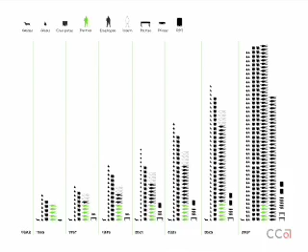But the 5 of us didn't really have a common stylistic sense. I think because we came from other fields, we were a little bit confused, especially in the late 80s, early 90s in architectural discourse, and the way in which architecture had been divided in the second half of the 20th century between sort of paper architects—the people producing culture and thinking, and all the fantastic design—and the kind of service architects, the people that could actually put buildings together and knew how to get things done.

They basically told us in school you had to choose one or the other. And that was really a kind of horrifying thing to us. We didn't understand why you had to choose one or the other.

At the same time, there was this moment where we were trying to understand, again as outsiders, this cycle of stylistic consumption that architecture had become obsessed with—where there was a new theory, it came out of writing, history, whatever, then it got a kind of form attached to it, then it got its big show at MoMA, then it was popular and made it into the New York Times, and then it was discredited, and then it was out of fashion. It was ridiculous to us.

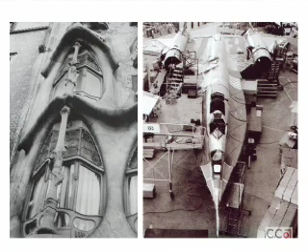And that was kind of exciting to us, that you could start to think about buildings in that way, and really began to use the emerging digital technology in the mid-90s, which was fast enough for us to begin to do simulations to really test if form and performance had a strong connection.

Of course, we looked at the history of architecture and the production of material, form, and ornament and its connection to technology, and we saw these long-standing relationships. Even though at that time the output from these experiments was often complex form, there was this incredibly long history of complex form in architecture.

The key thing was that when complex form was being made this way, it was all based on labor. Materials were expensive and labor was cheap, so you could build in one particular way. But in the latter parts of the 20th century and currently, it's labor that's expensive and materials that are cheap.

So very early on, we realized that the only way we were going to get some of this built, especially as a young firm that wasn't going to command the budgets that more established architects would get, would be to take advantage of CNC technology.

So in '98, '99, 2000, we decided to invest all of our thinking into CNC technology and to start using the computer as a way to fabricate this and to try and get towards the idea of mass customization.

Now one of the things that we started to realize, and I'll show it to you as we go through some of the projects, was that the notion of plan, section, and elevation really became a kind of limited language for us. There's something we're really trying to challenge there, and a lot of the investigation and research of the firm has gone into reevaluating if that's the best method for us to get our ideas across to the people who need to fabricate and build buildings.

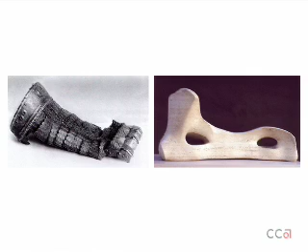For us, it really was never the form that mattered. It was how something was made and what it did that mattered to us the most. And the more we pushed into this realm, the more we realized we were kind of going backwards in a way towards a kind of master builder sensibility, if you will.

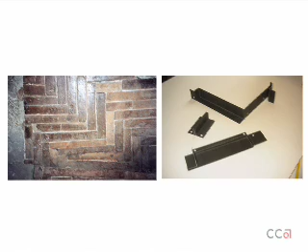So whether it's a few of the bricks from Brunelleschi's dome or 3 of the 4,000 custom pieces of zinc we made for the Porter House, we realized there were territories that had been given up by architecture over the past 30, 40, 50 years, and that it was time for us to grab them back and take responsibility and take risk and rethink the way in which architects could practice in order to push the limits of design.

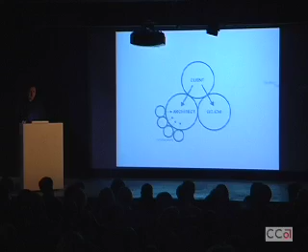So this is the only drawing in the AIA documents, and we have determined that this is the worst drawing ever made in the history of mankind. This is a drawing made by lawyers to try and make architects and owners and contractors fight, in order to force them to have work for the rest of their lives. And I'm not kidding, I'm not being facetious.

So I think a lot of the way we've started to really push practice in thinking about it was to try and challenge this diagram. Now, obviously it's very entrenched, and there are a lot of things you have to watch out for as you do it.

But I think step by step, and what I'll show tonight is 6 or 7 projects that talk about how a young office tried to grab these things, and in each project take one little step with R&D that both pushed the architecture, pushed the technology, and pushed this kind of structure behind the way in which things get made.

So very early on, I think the earliest and most obvious way to start was absorbing the consultants into the design process. Now, of course, we're bringing the engineers in, the mechanical and structural guys, but it wasn't really that. It was actually bringing the fabricators and even the subcontractors into the office before we would even design anything. So by saying, well, if we want to make something out of metal, let's bring metal workers in.

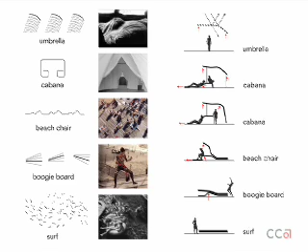The other thing we thought was interesting about the performative nature of a beach was the idea of the promenade. The fact that you either sit on the beach and watch everyone walk by, or you go for a walk and look for your friends, and there's always that interaction that occurs on a beach.

So we placed the architecture in such a way that the people hanging out at Dunescape during the day were the people sitting on the beach, and the unsuspecting museum goers passed through the architecture in such a way that they became the promenaders.

And we had 3 weeks to design it and 3 weeks to build it, and a budget of $50,000 for an 8,000 square foot space. So we said, well, we better make it simple. It's the only way to do it.

So we said, let's take just one structural element, which were 2 by 2 sticks of cedar, and we set them up in an AB configuration, the connection point being the spline that we pushed and pulled in order to make the surface bend and move, allowing every one of those programs to unfold on the surface. This was the first sketch of that.

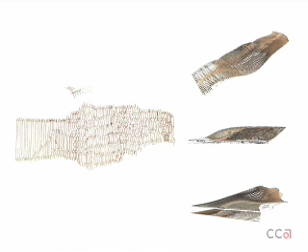These were the early models. This is actually the model of the element. The reds are the A's, the blues are the B's.

And Alanna Heiss, she was a great client. She said to us, I'd like you to produce an architecture that encourages as much illicit behavior as possible. So we said, well, what do you mean by that? And she said, I'd like people to take off their clothes and smoke as much as possible. So we actually embedded huge ashtrays right into the thickness of the walls themselves, and all of the dimensions were taken from dimensions of the human body, meant for people to overlap and continually touch while they were involved in the architecture itself.

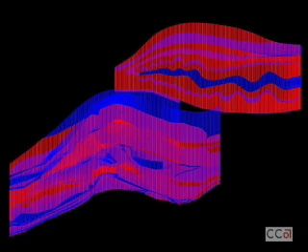Now, this is the construction drawing set. It's not out of focus—each one of these drawings, here's one blown up, was 15 feet high by 30 feet long, put down as full-scale templates. You basically followed the colors in a sequence, followed the black lines, lined up the two pieces, and whenever they crossed, you hit it with a stainless steel screw, and trimmed off the two edges, with the Z coordinates down here at the bottom.

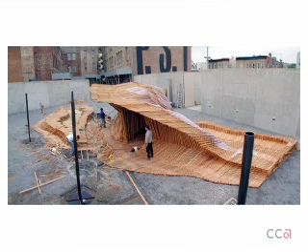And so you could see the pieces going together very quickly and inexpensively. And then we dug in the courtyard and planted a forest of steel trees that had high pressure mister heads on top. Here's the Dunescape when it was finished.

And then about every 15 or 20 minutes, they would blast and fill the entire courtyard with mist, which, as you were lying there baking in the sun, would be like the sort of spray off the ocean, hitting the cedar and wetting it, giving this incredible smell to the whole courtyard.

But here you could start to see the kind of smooth transition from a bench to a wall, or from a shaded area to a pool.

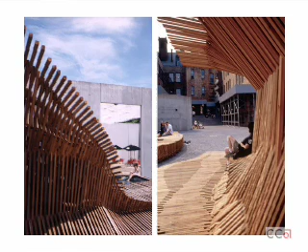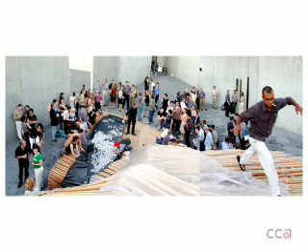This was the night before the opening. They gave us the courtyard for one night, so we filled the pool with beer and had our own party.

These were some of the interior spaces. The other interesting thing was we developed a series of secret chambers inside the thickness of the structure itself, designed for two or three people at a time, that you could crawl inside and see everybody at the party, but nobody could see you. They were unbelievably well used all summer long.

And this was a typical day at Dunescape. The interesting thing that happened was we got a lot of press from this, and people were excited about the architecture. We had so many articles that it actually drew more than 6,000 people per weekend.

As the summer was winding down, I was sitting there hanging out, and I said, that's interesting. 6,000 additional people times 10 weeks times $10 admission plus 3 beers and a hot dog or hamburger average. Suddenly I realized we generated about $1 million in additional revenue for the museum that year, and our fee was $12,000. I said, something's really wrong with this architecture thing.

We've got to try and fix it. But I think there was something very interesting that happened at that moment for us: we finally felt free of the kind of modernist canon of the separation of structure, skin, and program. And we started to get very interested in the notion of thickness.

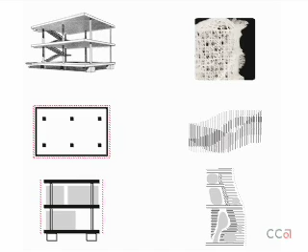Talking about that journey, there were certain things we did learn that we applied for some other little projects right around that time. Richard Branson saw PS1 and asked us to do the first-class lounge for Virgin at Kennedy Airport.

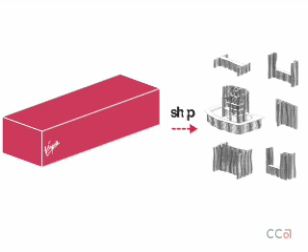The idea is that typically a first-class lounge is behind a closed door and you never see it. The idea here was to make a first-class lounge that was almost a billboard, an aspirational billboard, that you could see, you couldn't really get into, but it might encourage you to upgrade to a first-class ticket.

It's funny, I just saw this morning for the first time in a year because I took Virgin Atlantic out this morning, and I knew something was missing. They removed that part.

The thing is, you check in over here and you can see right through the screen out to the runway through this lattice work that holds the lighting and the structure and all the forms. But as you move into the space, a kind of moire pattern emerges that gives a certain intimacy to the spaces themselves. There's a waterfall and a stream that blocks the sound qualities of the airport.

Can you see that? Yeah, you can. So again, this was one of the first times that we really got into developing nesting drawings for the mills to fabricate pieces.

All the parts were made into component pieces that could be delivered to the airport and assembled in a certain sequence that would get us around a series of rules with the Port Authority.

There's a whole lighting system that goes from yellow to orange to red that's timed with when the flights to London are leaving. So the redder the whole space becomes, the faster you have to run to the gate to get there.

It also brought us to a project we did outside of Seoul, Korea. It's called the Hangil-sa Bookhouse. Hangil-sa is sort of like the Rizzoli of Korea in a way, and it's part of the Heyri Art Valley Complex.

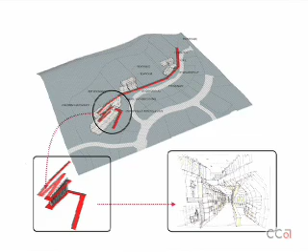You actually come off the hillside and enter the building at the top, then walk down a ramp around a 3-story high wall of books that are the bookstore itself, and come down into a kind of restaurant and cafe space. There's a sculpture garden here.

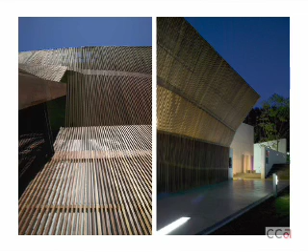We prepared all these drawings, and it got fabricated in Korea and assembled like a kit. And it worked pretty well. Here you could see the bookstore as you come down and you move around, and what the building looks like at night.

But the more we got involved in this, the more we realized there was a lot we were doing with the contractors and construction managers to actually get this stuff built. So on one project, Mitchell Park, which was a competition we got third place in but eventually got the commission to do, out on the eastern end of Long Island, about 120 miles from New York City in a rural fishing village.

They had a 4-acre open spot. This is Main Street, and that's Front Street there. There was a big open lot, and they held a competition to build a park. They had a series of programs that they suggested, but really there were only a few they insisted upon, and the key one was a carousel.

The town's prized possession was an antique carousel given to them by the Grumman Corporation in the 60s. It sat in a Butler building right here on the corner. They charged $1 a ride and got about 1,000 rides a month. So they wanted a new carousel house in the park, and of course they wanted it to be a Victorian carousel house.

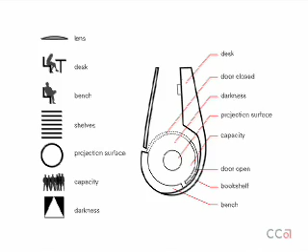And then the last piece that we were going to make — as we said, we started this project in '97, and this was now about 2000, well, we started working on this maybe around 2001 or '02. I think the idea for the camera obscura was to really push it.

Here was a building — we'd learned enough about using the technology, and it was a small enough building, and we had gained enough trust with the client that we really wanted to push it, to see if we could make a sort of pure performance envelope and have the entire building fabricated by the computer. So there was a certain series of programmatic requirements.

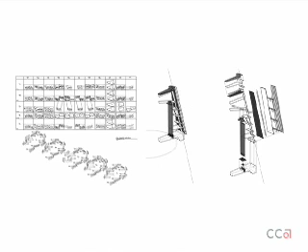We tried a kind of minimum surface form. This was sort of BIM version 0.01, where we modeled every single piece for the building. And these are the construction documents. In 3D, we cataloged and indexed all the different material types so you could see where they went. Then there were basically 2 kinds of drawings in the set.

There were drawings that explained to the computer how to make the parts, and then there were drawings to the contractor on how to assemble them. We basically produced the whole set, and when we were done — these are the actual construction documents. There's nothing, these are not presentation drawings, these are taken straight from the set: fold, weld, bolt, screw, you know.

And the interesting thing is, we were finished with it, and we looked, and we realized there were no dimension strings on the whole set of drawings, because they were totally irrelevant.

Every single piece arrives on site pre-cut, pre-numbered, pre-drilled, ready to go and put together. In fact, the worst day on the construction site was when Mark Hours, one of our guys, heard one of the contractors start a saw, and he just ran out shouting don't cut anything, because he had actually just picked up the wrong piece and it didn't fit, and he was going to trim it to make it fit, but there was no saw needed. In fact, the contractors didn't have tape measures on their belts for the whole process because they were irrelevant.

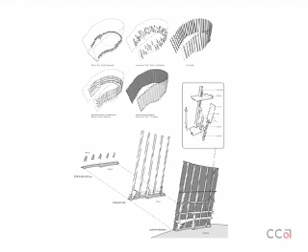So here are some of the drawings. You can see the equipment making the pieces, even the templates. These are the flanges on the compression ring, and we laser cut into the parts instruction sets showing where the welds go, which piece lines up where. It was all there to make them look at the drawings as infrequently as possible, and just be able to build it like the most kick-ass piece of IKEA furniture you could imagine.

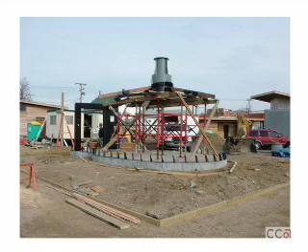And even the formwork was all milled as well, so the surveyor just shot four locations and then full-scale templated out. They dug the hole and assembled the pieces, and I think it was four guys who built it in about 7 or 8 weeks. And the piece went together. That's sort of the interior.

It was a really phenomenal thing for us, because we realized for the first time that, okay, there's something here. You can actually build buildings this way.

No one is ever suggesting that you build a 45-story building like this. That's not the point. But what you can do is find the critical parts of your building and invest a tremendous amount of time into thinking about how to do things this way. Then a lot of the rest of the building can be built using very standard methodologies. You could really see that this was something that was going to pay off a lot for our profession into the future, and it gave us a lot of confidence to move forward into larger projects.

And this is kind of what the whole park looks like now. There's the camera obscura out at the end.

So we started realizing that we were really doing a lot of good things for our clients, and making the money too. The last thing was that on the park they were getting 1,000 rides per month, and now with this new Victorian carousel house that they love so much, they get upwards of 50,000 rides a month in the summer, and it's actually up to $2 a ride now.

So it's generating hundreds and hundreds of thousands of dollars for the town, and they've planted flowers up and down the whole main street, and their real estate market's gone through the roof, even held on during the downturn. And it's not a surprise — Mayor Kapell, who really spearheaded this whole project, is also the town's biggest real estate broker, so I think he was pretty smart in using architecture as a way to drive desire.

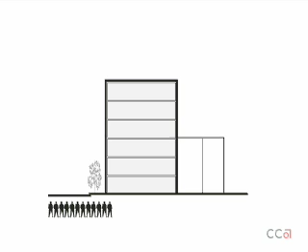So the first time we were able to do that was a building called the Porter House in the meatpacking district of New York, and there were 10 developers fighting for a 6-story warehouse building, a turn-of-the-century warehouse building. The owner was trying to sell it and obviously wanted the most money for it, and I think everyone was trying to think about how they could raise their bid to get control of this building.

So there were two smaller historic buildings to the south, and this building was built to its full FAR. And what we said was — maybe 7 out of the 10 developers thought about doing the air rights transfer. Now, there was a height limit in the neighborhood, and there's also a setback requirement from the street. So that was the sort of first thought, but of how much air rights we could transfer.

The next idea was the only way to increase the size of this addition, and therefore the potential revenue down the road—which would give a little more money to outbid the other developers—was to cantilever over these two historic buildings to the south.

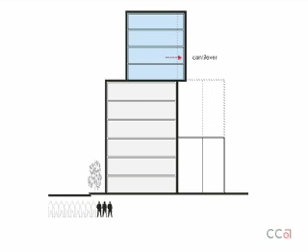Working with Buro Happold, our structural engineers, we came up with an interesting way of moving the core, which became a kind of new reinforced beam. We put a three-story Vierendeel by building a six-story new building onto the six-story old building, but overlapping on two floors, in a very inexpensive way, to get that cantilever out a little further. Those extra couple feet were enough additional revenue to allow us to be the last guy who could bid the most to get control of the building.

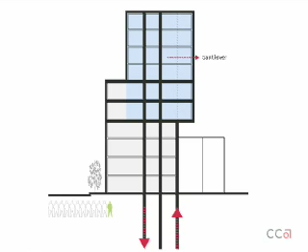So we didn't really have the money to do any of this, but we went for it anyway. We approached one of our clients and asked if they wanted a joint venture on this, and they said yes—it's really interesting, Jeffrey Brown. So we were going to take this new box and put it on top of a historic building.

I think we really wanted to push the idea of what contextuality meant. Our feeling about contextuality was that it shouldn't be contextual at all. So we decided, let's make it zinc. We wanted to use zinc and make a metal panel building—we hadn't tried that yet.

We talked to lots of zinc fabricators, and the prices were ridiculously expensive. So we actually went to France, where most zinc comes from, and bought one-meter by three-meter sheets of zinc, about a thousand of them. We designed the panels so that one unfolded sheet fit on a sheet of raw material, or two sheets, or three panels on a sheet.

We took four window sizes, all the same height, floor to ceiling, and had two light boxes—a thin one and a thick one. That made about 22 protoforms. We then played around and wrote an algorithm to spread these panels and pieces all over the building, almost making a kind of cloud that sat on top.

One key thing we felt was that when you're doing metal buildings, sometimes when the glass and metal are in the same plane, it gives a kind of thinness to the facade that we didn't like. We really wanted depth and texture, so we ended up pushing the glass back 14 inches everywhere on the building, which immediately made us think: we're going to have ledges everywhere. And in New York, we have pigeons everywhere.

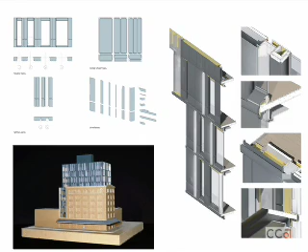At the end of the day, there were 4,000 different pieces of zinc in over 480 unique shapes. To draw all of that in shop drawings would be impossible—you just couldn't do it. So this was the first time we played with SolidWorks. We drew the panel prototype and then fed all the differences into a spreadsheet, which went directly to the laser cutter to cut all the parts. There were actually no shop drawings made whatsoever.

All the panels got labeled, laser cut right into the facade, and that was the instruction set for where the pieces would go on the building as it was getting built.

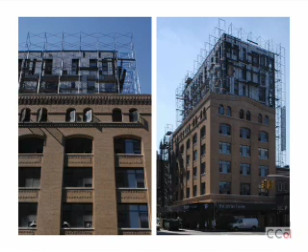Here you can see the facade as it's going on, and what the building looks like today. We started at that corner, went all the way around, and came back to the other corner—we were 1/32 of an inch off after putting up 4,000 pieces of zinc. So again, we were like, okay, this stuff works. This is a good idea.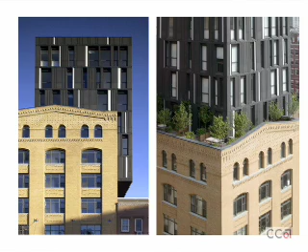They were condominiums, and we did everything—the interiors, the collateral materials, the lobby. Here you can see the cantilever portion of the building, the setback terraces, and the pigeon slides, which were labeled PS and then their number.

Is this going forward?

You can see the kind of depth in the paneling. We designed all the collateral materials, brought them to market, and sold them. It's a retail space in the base, with 22 units above.

Jason, are you here? Jason Anderson? Were you there the night we all went out drinking when we turned the lights on for the first night?

There was one night I remember, after a softball game, we went to the meatpacking district, and we called and they flipped the lights on, and we were like, hooray, and stayed out till 4. The next day I woke up with a vicious hangover, and my lights weren't going on in the apartment, and it turned out it was the blackout that had hit the East Coast that night. For like 30 seconds I was just like, I hope we wired that thing correctly.

But that worked out very well.

The interesting thing, and the amazing thing about the Porterhouse, was when we were going to do this, a lot of our colleagues, fellow professors, and friends said don't do that, you're going to get in bed with the developer, you're joining the evil empire, you've gone to the dark side. We were sort of threatened in a lot of ways.

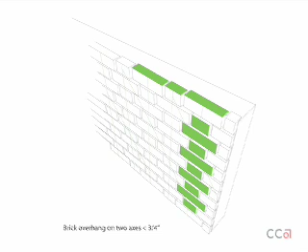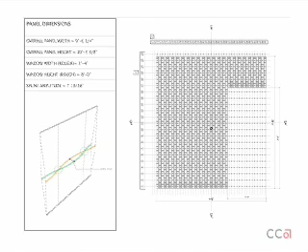So we studied tons of different brick patterns and overhangs, and worked on software that let us analyze different panel shapes and the way the panels and the sine curves would match or not match or come together, along with the orientation of the brick.

We looked at the requirements of window sizes, setbacks, and the building envelope, but tried to make the least number of eccentric panels versus standard panels possible.

It really developed an interesting feedback loop that we were able to drive the design out of, including how big the panels were—what was the biggest panel you could fit on a truck that could get into Manhattan through the tunnels and bridges without special permits, and how many panels could be made to use a less expensive crane with the fewest picks to get panels onto the building. All of that really drove a lot of the design.

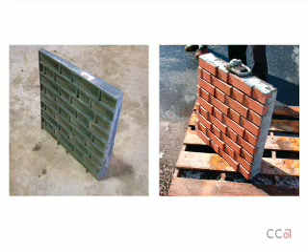So these were the test molds. This was the CNC milled mold, and then this was the test of dropping the bricks in and pouring it. And some of the earlier renderings.

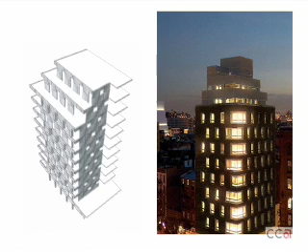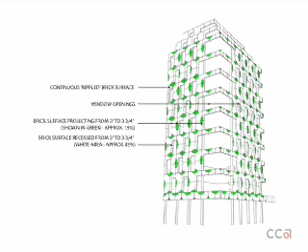This was kind of interesting. There's a small rule in the New York City Building Code where a certain percentage of your building can actually go over the property line, put in place to allow detail like cornices and window surrounds. We were able to calculate it to the brick, exactly how much of the building was going over the property line, and by giving the building department that much detail, we were able to push out the entire perimeter of the building by 6 inches. That doesn't sound like much, but 6 inches times the perimeter times every floor gave enough additional revenue that it actually paid for all the custom molds—so that was essentially free compared to a straight panel system. I know it's incredibly nerdy, but we get really excited about that stuff.

Other times we've worked as an advisor to our clients. A competition we did back in 2005—in fact how I met Isla, back in her Tulane days—was to do a new building on the campus of Tulane. This was going to be the Murphy Institute, attached to an existing building, one of the only buildings that wasn't orthogonally oriented to all the other buildings on campus.

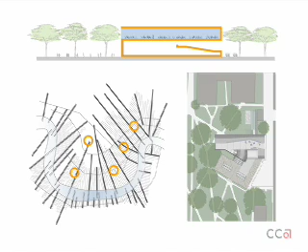The things we noticed about the campus were that it was incredibly flat, had a very thick tree canopy, but almost no shrubs whatsoever, and that really struck us. So the idea of the project was to float as many of the classrooms in the tree canopy as possible and keep as much of the ground plane open as possible, and then look at the ways New Orleans had always dealt with its geometric anomalies.

We used some of the same techniques that we used at PS1 for this building—it was an ethics, economics, and philosophy building, the Murphy Institute. Reed, Isla, and Martha had all said they wanted a building that would get people talking to each other from different programs, so we used these structures to encourage cross-disciplinary pedagogy and interaction.

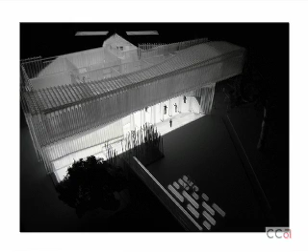This is actually the historic building with an atrium carved out, and this is the new building behind it. The students can move right through—here are the classrooms and the big lecture hall, and the students move through over here. And these were some images from the model.

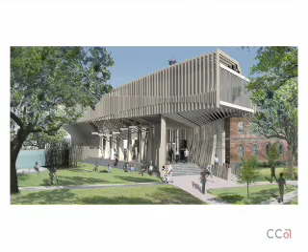We were really excited about it, and fortunate enough to win the competition. We spent the summer negotiating the contract and came to an agreement right around mid-August of 2005. We were supposed to go down there right after Labor Day, and then Katrina hit, and we figured the model had floated away somewhere down there.

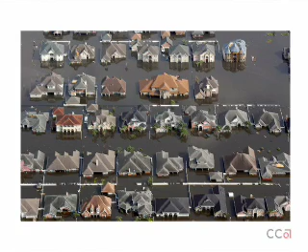But about 4 days after Katrina hit, Martha Murphy, the donor, called us and said she lives in Pass Christian, Mississippi—all her homes were destroyed, she was living in a trailer, and they needed help, someone who knows how to get something built. Will you come down there? So we said okay and went down. This is Pass Christian on day 7 after the storm—that's Main Street, about a block off the Gulf.

That's Martha's house, and it was a fascinating thing.

So we went down with Chris Sharpless and Craig Schwitter, who's the head of Buro Happold, New York. No one believed that we would actually camp. I'm from New York, you know, we don't know how to camp, and so they made us take pictures of that.

There's Craig talking to everyone. Craig was one of the guys who was on the pile the night of 9/11. He was one of the 6 engineers asked by the city to help take the steel down while they were still trying to do rescue efforts. And we did the first piece of infrastructure built at Ground Zero, the Rector Street pedestrian bridge.

It's terrifying, but between FEMA and the Red Cross, no one really knew what to do. The fact that we had worked on 9/11, albeit in a superficial way, suddenly we were in charge because we had actually dealt with a crisis before. A lot of the government officials were told, well, we really can't do anything. They were great people who wanted to help, but were instructed not to, which was a fascinating and eye-opening experience for us. So Martha owned this piece of property.

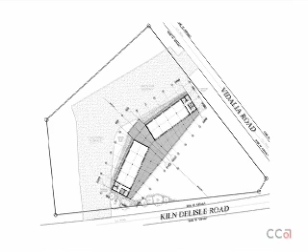So we made an entryway you came through with signboards and information kiosks. And then there was this big porch where the town could come together. We had no idea what would go in there. And Martha said, do something at least cool, don't make it look like a FEMA building. So we made this roof, this kind of big wing roof.

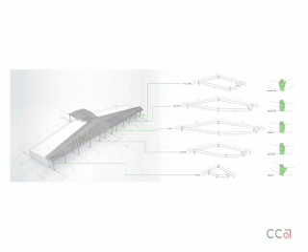We had very little skilled labor to work on it. They were either working on the big projects downtown or had left. So the way we were able to get the complex form done was through a series of custom flitch plates that we had cut in New York and sent down.

There were some guys from shop who were at the field office. They were amazing and dedicated so much of their time. Reese Campbell and Fed Negro were down there. And we got the Navy Seabees to clear the land and do a lot of the work in exchange for cases of Budweiser, which you had to drive 40 miles to get sometimes.

And here they are clearing the land. It got built in about 8.5 months. And this was right before people started moving in. I mean, now it has...

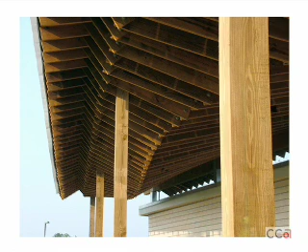A laundromat, a beauty parlor, a law office, a restaurant. It's sort of the seeds of a town. The lights are all up inside the wing, and it glows at night. And that was the building, and we got it. The interesting thing is, it was the first building completed in Mississippi on the Gulf Coast after the storm, so it was an amazing experience for us.

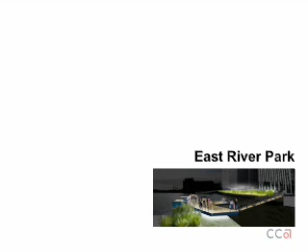Another project where we worked with a client to advise them on what to do with the city was on the East River waterfront. This was a competition we entered with Richard Rogers and Ken Smith, landscape architects, and Buro Happold as well. We won the competition to do a master plan for this 2-mile stretch of Lower Manhattan, which is mostly underneath an elevated highway, similar to the Embarcadero freeway before the earthquake.

But you could see, between the infrastructure, there were some places where there were actually more than 12 layers of chain link fence from where people lived to the waterfront. There was just no access whatsoever. Or these beautiful 18th century squares at Peck Slip that were being used as parking lots. So the basic idea here was to take all the different neighborhoods and figure out a way to make the cross-grain connections work to get people just access.

So we rented a helicopter and flew over all the shorelines of the 5 boroughs of New York and developed a taxonomy of shoreline types.

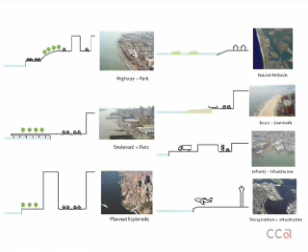There were only a few places where the buildings got really close to the water. This is kind of where we were—there was a street here where people actually worked, and then almost 120 feet from the last edge out to the waterfront, then a chain link fence, and then usually a shed on the pier.

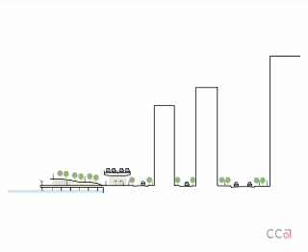So what we said was, look, if you just get rid of the parking underneath there, add trees and bike lanes, and instead of thinking of the overpass as a big, ugly, dark thing, think of it as a free roof and build inexpensive boxes underneath that you could fill with recreational, community and cultural facilities to make a new kind of esplanade or park where the city actually comes out to the waterfront. This was an early idea with the glass boxes—we had to build up the planters since there was no soil below, plus a bike lane and sidewalk.

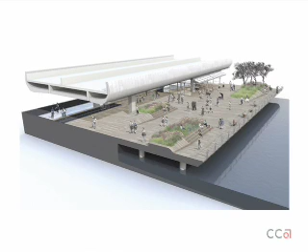At that time, Richard started getting a lot of other commissions in New York, like the Ground Zero work—he got WTC #3 and the convention center. So there was a second competition to see who would actually design it and do the drawings, and Richard said, 'You guys can handle it, I'm busy with other stuff.' So we went after it again on our own, and we were lucky enough to win it a second time.

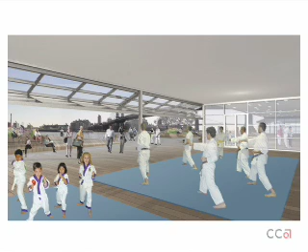They still didn't understand what would go in these pavilions underneath, so we said, well, we don't know either, but it could be anything. Anyway, we've been working on it, and this is some of the later drawings—this is what the pavilions look like these days.

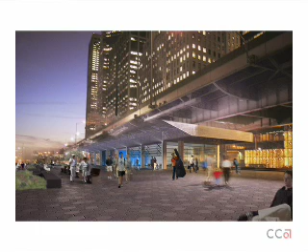We're in the last months of drawing it, parts of the package have already gone out to bid, and we break ground in about 2 or 3 months. This is a pier where we double up the piers with a passive recreation landscape on top, plus more pavilions on the piers underneath. Here you can see the current design for the pavilions with their operable glass walls, and the current planter and furniture designs.

There are spots where we're trying to get you down to the water, breaking down the seawall where the historic slips used to be. This is one of the designs for Pier 35.

This is the one part that's in flux. Where it gets very narrow, we've tried to peel this walkway off and do mussel beds, artificial mussel beds in the East River. But the DEC is giving us a really hard time, and we don't know if we're going to get through it. So that part we don't know what'll happen, but we're trying.

But it'll break ground, and it'll take probably about 5 years to finish. We got $150 million to build it, and we're underway in about 2 months.

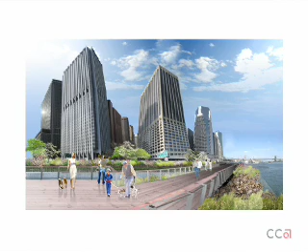One of the interesting things that happened was right in the middle of this is a large pier called Pier 17, which was a Rouse development—the sort of festival marketplace shopping mall guy from the 70s and 80s. It's just this awful part of New York City that no one who lives in New York ever goes to. The Rouse Corporation was sold to General Growth Properties, GGP, out of Chicago about 4 years ago, and they liked what we were doing in the whole neighborhood, and asked if we'd take a look at their site.

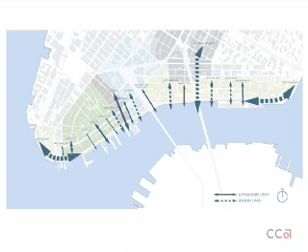We have this 5-acre waterfront site with a 3-story internal shopping mall on the waterfront in front of the Brooklyn Bridge—good idea. So we did look at it, and we said there's a historic building that's up against the highway.

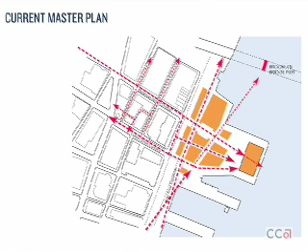We said it was an old fish market building—move it back and reestablish it at the water's edge. Get the network of streets and the esplanade and the view corridors into that space. Fill it with a filigree of smaller, lower buildings, and then make about 2 acres of open space for a grand piazza that would face the Brooklyn Bridge and the historic ships to the south, and transfer that FAR into a slender tower on top to pay for what turns out to be almost 4 acres of public park given to the city.

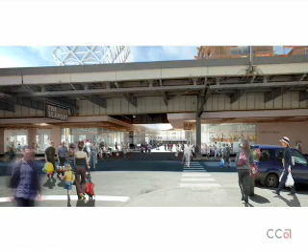These are the shopping pavilions, and we took these kind of wave patterns and wood elements to make these sort of arcs that float across.

One of the things was that you get down to this key corner and you can't find the Brooklyn Bridge, so we carved this sort of slice with this forced perspective that orients you towards the bridge.

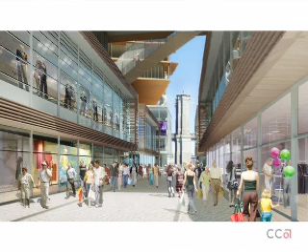Well, the diagrams died. And then these are the hotels that float up above, and they're actually hung from 4 super columns, and then it's a kind of gantry, and the hotels float above the low-lying retail stuff.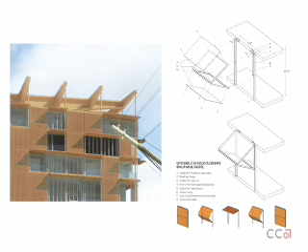The idea is to have sort of operable facades, a bifold door that every room would have its own remote control. So from bed, you could operate your shade, which would open or close your room. And every time you would see the hotel, it would be a different configuration.

And then the tower, which was the trickiest one, obviously, where we were trying to dematerialize the tower as much as we could. So we started shifting the volumes and separating them, and then the idea was to float the 3 volumes of the building within an exoskeleton superstructure that would sort of break down the mass.

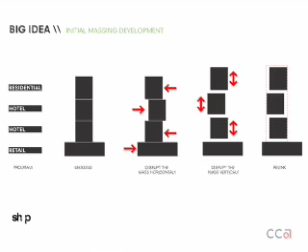And this is the sort of current design of it. It's steel clad in terracotta.

And these were some earlier renderings of it. This is the model for the client.

This is going slow. Whoops, lost that one. Let's go back one.

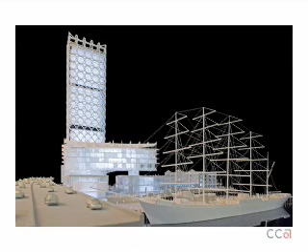So here you can see the whole complex on the waterfront and the tower. There's currently a Gehry building going up right behind it, under construction. Another view of it.

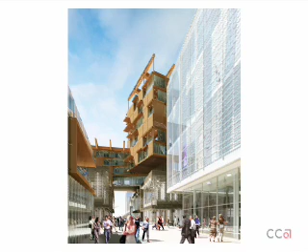Down the middle part, so we're in the middle of battling for approvals on this right now. The community's actually supported it. City planning supported it. The Economic Development Corporation supported it. We're fighting with landmarks right now, but we think we can win.

The big problem, this is one of the restaurant pavilions, and the big problem that we're having right now is that unfortunately GGP stock, which was $67 a share when we started, closed at 45 cents a share last week. So they're not really focusing on it right now. But hopefully they're looking for a joint venture partner, and we're probably 85% of the way through the approvals process, and we're keeping our fingers crossed.

And then that's one of the piers from the park, and the Esplanade moves all the way through on that spot. So to the last project I'm going to show you tonight, which was the Fashion Institute of Technology, a competition we entered, probably 2003, that we won.

I know this is very depressing how long all this takes, but FIT is this kind of brutalist campus in Midtown Manhattan, and has all these fantastic programs, but the people in the city can never really see what goes on there. Very different feeling from your buildings here.

But again, for us, the performative nature of design school, we felt, was kind of exhibiting your work, reviewing and critiquing your work, and circulating your ideas. We felt that if we could make a building that performatively allowed that to happen, we would have a successful building.

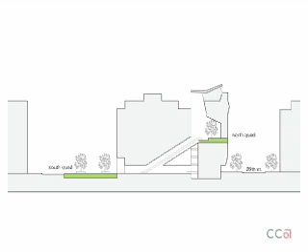And so again, it was this idea of making this kind of thickened facade that embedded all the circulation, the exhibition, and the critique spaces for the building.

This was the model that won the competition. And we won, and then we actually spent 2 years remaster planning their whole campus, and then we spent a year redoing the whole program and redesigning the building.

And then we've actually spent the last 2 years both drawing this building and renovating about 60 labs and other buildings to reorganize their space, to make enough space so that when we start building this, they can keep the university functioning while we build the new building.

But again, a very simple idea where there's two concrete towers, and then it's a very standard kind of loft construction building with all the classrooms. Then there's a large truss that hangs the seminar rooms and faculty offices above, so that the quad is column free. And then there's this one highly specific element that becomes that thickened facade on the front. All of this is made very simply, except for that facade, which is made exactly like the camera obscura is made. And embedded in that thickness are all the circulation for the building and the critique spaces, the exhibition spaces, runways, and other elements.

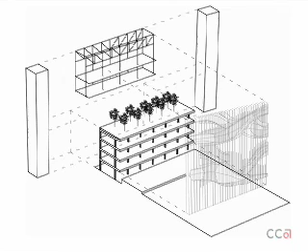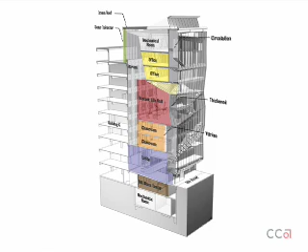So again, you can see, and then there's a strong sustainability part embedded in the performance and the way that air moves through this atrium, so that all the existing building portions can still get natural ventilation, even though this building is right up against it. And the current thinking on the facade. This is the model at the end of design development in our office.

So anyway, you can see the escalators embedded in there. Some of the CFD modeling that was done that helped generate the form.

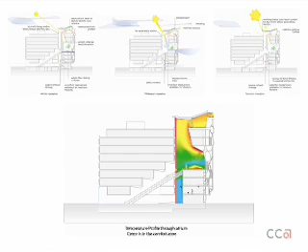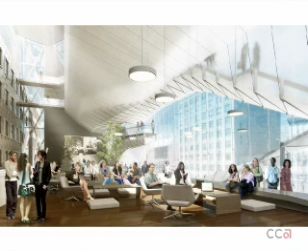You can see again the thickened facade on the front there. That's a view looking through that thickened facade into the main room. And all of that whole facade is actually hung on cables. This is looking in that sort of north quad, if you will. So it's really almost like a thickened piece of fabric that hangs on the front of the building. And looking west.

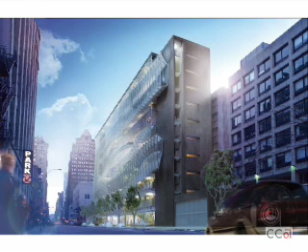So we were working on it in October. The state and the city were 50-50 giving money for it, and the state had given its money, and then with the economic crisis, the city balked, and everything went on hold. But we just found out that it's been part of the stimulus package, and we start tomorrow building it again. So we're hoping to get it in the ground. Well, we have to get it in the ground by November. That is our president's rule. So it will be in the ground by November.

Okay, so the ending thing is we're thinking about all of this stuff, and we started saying, like, well, could we just get rid of the client? Would that work? So we started thinking about that as an idea.

And it really made us think about something, which is everybody blames this guy for everything. My laser pointer, you know, you're Italian and you kind of gesticulate, so you do it with a laser pointer in a lecture, and so I killed the battery. But anyway.

Everyone sort of blames the developer for the lack of creativity and the kind of thing that we as designers always have to fight against. But it's really not the developer that's the problem. The problem is this guy. That's the problem, because the developer will build anything that the bank will give them a loan for. But the lender will only give a loan for something, and what they'll say is, I want 5 comps. And comps are comparables. And what does that mean? I want to see the 5 other buildings in this neighborhood that are designed exactly like this, and I want to know exactly how much they sold for. And of course, what those comps were, what the products were that were available, those were what the real estate brokers had to sell, which were the only options the purchasers had to buy, which drove the sales data. Like, oh, people really like granite countertops. Well, I don't believe that. It's just they only had the choice of granite countertops. And that drives the marketing, which pushes the interior designers, which forces the architect into this horrible position.

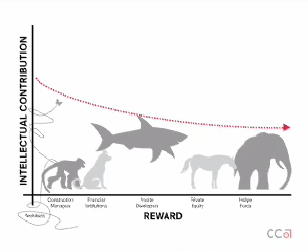That's what I'm talking about, sort of doubling down. This idea that the more we can take what we do so well, this wide-ranging skill set... we do something very few people can do. We invent something in the future and solve problems three-dimensionally, and then we convert them into a language for other people to then reassemble what we had once thought of. That is a very difficult thing.

But if you're only going to do the imagery of it and not get into the thickness of it, you will never be in the position of taking risk, and you will never be in the position of gaining reward. So that's really what we're making a call to do, to take what we do and do it well.

Now, these are six buildings that we took huge risks on. With the world falling apart, some of them we made money, some we lost, and some we broke even. But at the end of the day, we probably broke even all the way across. It didn't matter—we got six buildings built, and we started to really think about how we do things, and we understood a lot more about the process.

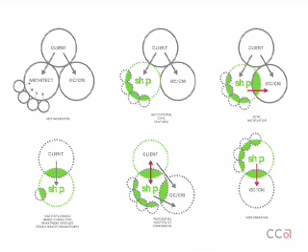So what SHOP has tried to do—we've started all the real estate stuff I've talked about, we've started a BIM consulting and construction management company, and we've even started a software company where we're writing new kinds of programs for what future designers are going to need in order to get into that thickness.

Some of these might be successful, some might fail, but it doesn't even matter to us. It's part of a think tank and part of an attitude of expanding what we can do as designers to really play a bigger role in the way space gets made.

So I'm not calling for a new style or a new period or a new theory or a new philosophy. What I am calling for is—it's an amazing time to be a young architect, because what's happening with technology is creating such a huge paradigm shift that this is the moment you could grab those territories back. So I guess all I'm saying is what SHOP is about, and what we are calling for, is taking that responsibility and taking that risk, because I think as a profession we have so much to offer for the production of culture.